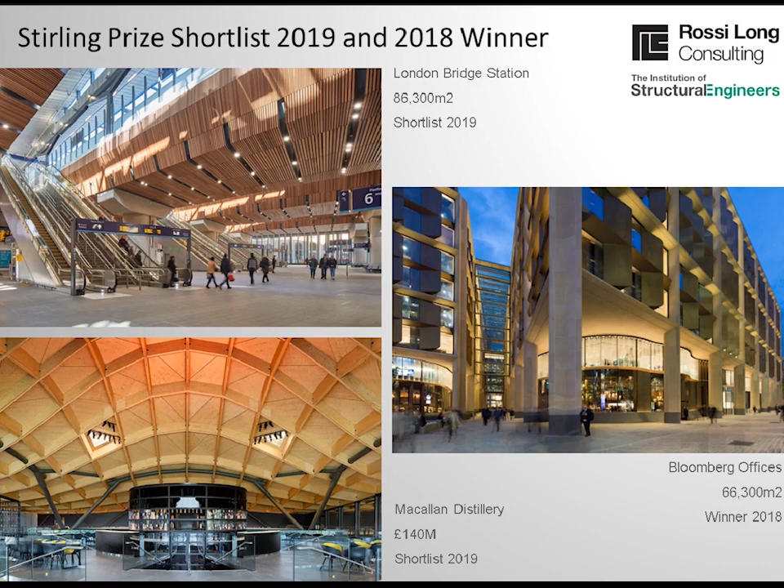Goldsmith Street, by comparison, is much more humble in scale and is recognised instead not just for its architectural merit, but also for its immediate relevance to the current issues of fuel poverty, carbon reduction and housing shortage, and it succeeds in pushing the boundaries of the visual appearance of passive house developments. I believe this development has potentially the strongest message among the finalists, and its success emphasises the significance of sustainable development, and in particular housing.

There are already signs that the profile of this project and what it set out to achieve is already changing the mindset of some of those who influence local authority housing, and this could be the far more reaching legacy of the project, thanks to the RIBA judging panel.

For those of you who relish detailed calculations and groundbreaking technical complexity, I'm afraid my presentation won't be going down this route. Goldsmith Street remains a low-rise residential development at heart, but there were a number of technical challenges which I will highlight. Instead, I thought this was an opportunity to give an overview of passive house standard construction, its relevance to our collective challenge of meeting sustainable design standards, and share my experiences of structural design on a passive house scheme. So today I'd like to talk on three areas.

I'm going to start with a review of the sustainability challenges that the institution has presented to its members online and through recent publications of The Structural Engineer. What are the objectives? What can we be doing to change and influence the designs to be more sustainable? And what are the challenges? Well, one approach is a fabric-first design to lower energy demand, and this is where the passive house standard comes in.

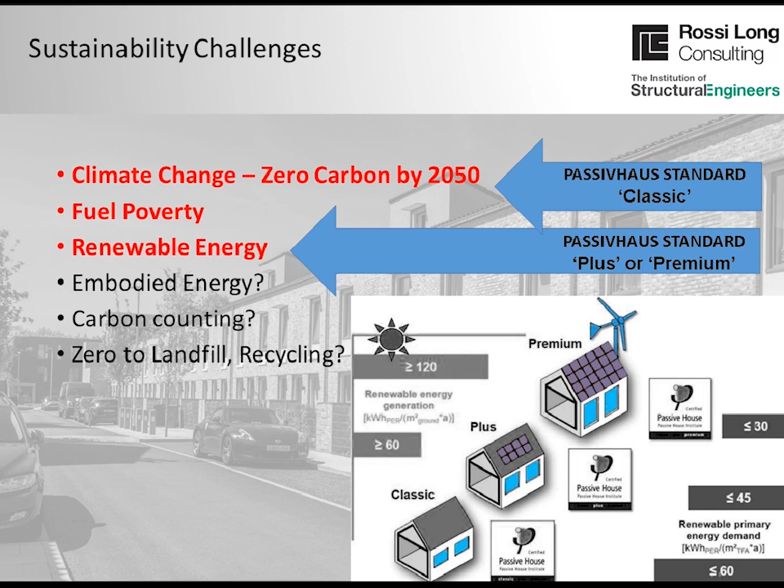So let's have a closer look at what is involved with meeting the Passivhaus standard.

The term Passivhaus is misleading, as it's not limited to just housing. It is a concept originally defined in Germany in 1996 and sets out energy performance criteria for any building type. It does not, however, define standard details or forms of construction, as we're used to seeing with robust details, and these criteria are summarised on the slide.

Passive House is growing in popularity in the education sector, where it's been demonstrated that students show greater sustained concentration levels due to the higher quality of air with lower carbon dioxide levels. There are over 20 Passive House certified schools and education buildings in the UK, with more in construction at the moment. In other sectors, we now have Passive House standard offices.

A Passive House swimming pool is being constructed in Exeter, and there's a Passive House hospital in Germany. China is currently using the standard on a vast number of residential developments. This is an approach which has great potential for our future built environment on a global scale.

So for those of you who have not encountered Passive House design, these criteria will be required to achieve the standard, and the project needs to be independently validated by a certified assessor. There's an emphasis on both design and construction in order to achieve the standard and the principal criteria.

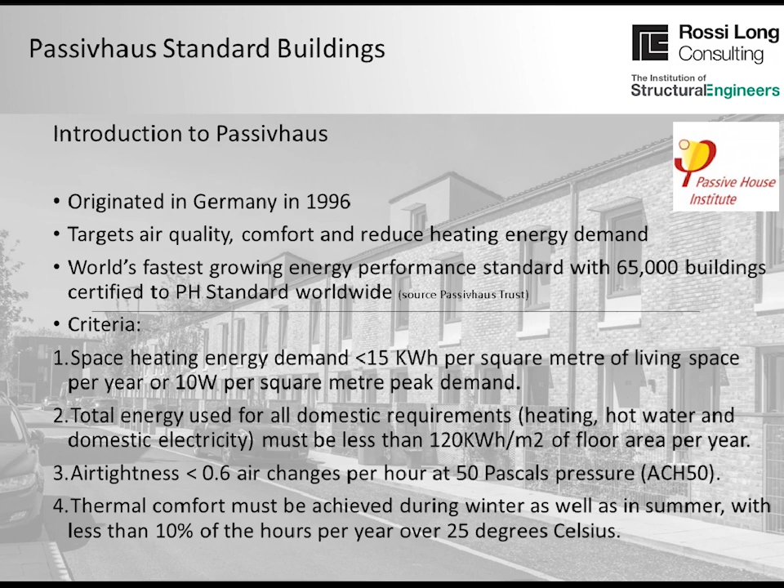And this is where structural engineers and their fellow architects and design consultants have to consider the following 5 characteristics of Passive House design. These are the design cornerstones of achieving economical Passive House accreditation.

The first is a high specification of air tightness. In the construction industry, we're accustomed to requiring a value of around 5 air changes per hour for a typical build specification. Structural engineers tend to be less involved with considering this requirement, as air tightness is typically achieved through architectural detailing and construction good practice.

Often with the contractor needing a few cans of squirty foam and tape on hand. But this approach isn't going to cut it to achieve Passive House standard, where a maximum of 0.6 air changes per hour must be achieved.

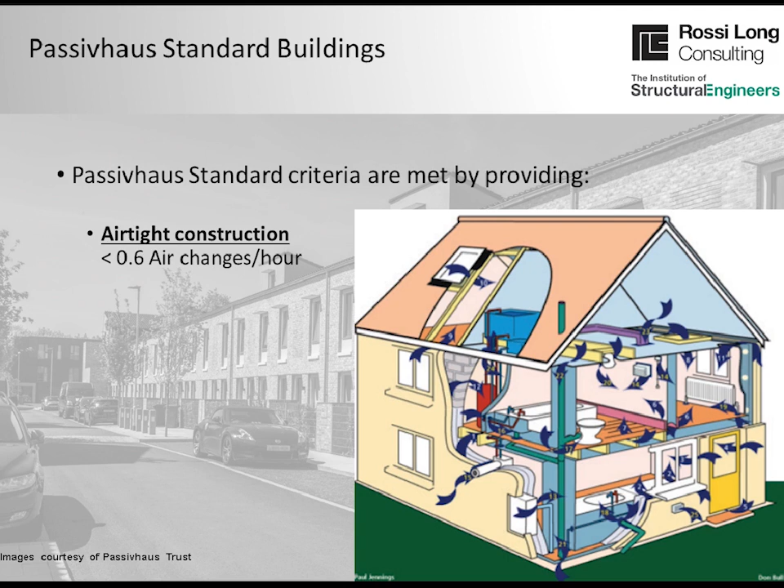It requires a great deal more coordination with the architect on how these details can be achieved, and without good detailing and a rigorous specification, it is likely that the contractor will encounter failures. The more complex and bespoke the detail, the higher the risk of problems and delays in building them. Simplicity of detail is usually the key, and without stifling the architect's creative flair can be the structural engineer's challenge.

The next is the insulation thickness. It's typical for Passive House external walls to be around 600 millimeters thick to achieve the required U values. This will have an effect on the structural components such as the foundations and outer leaf stability.

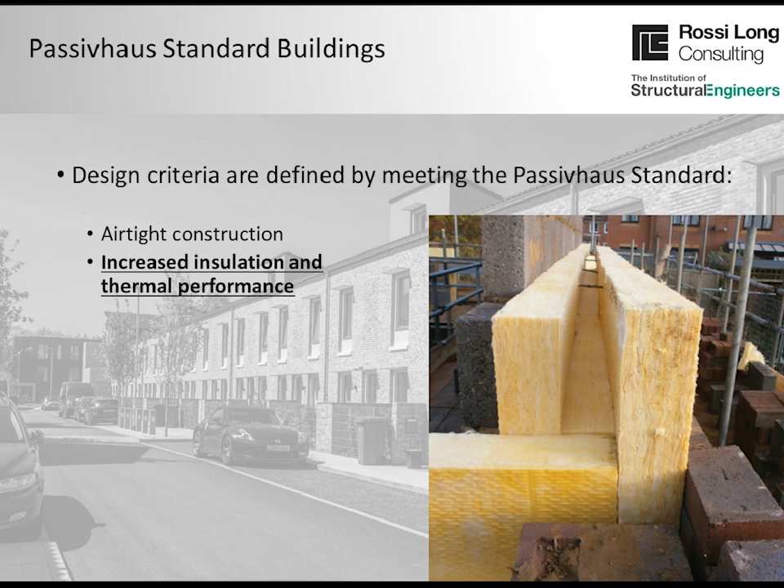And if there are high loadings through the inner leaf, the engineer has to be mindful of eccentric loading going into the foundation. The outer leaf has to be tied to the structural zone for restraint without causing thermal continuity across the cavity. And once solar shading is incorporated too, this can also present challenges.

One area which causes the most headaches for both the engineer and the assessor is the inclusion of thermal bridges. This is one of the key challenges that Passive House design presents to the structural engineer. Even with the most straightforward architectural approach with a uniform superstructure, the engineer is presented with the problem of how to provide structural continuity into the foundation without causing thermal bridging.

In most forms of construction, a structure will provide a direct connection between the superstructure and the foundation. Think of a steel column base plate onto a pile cap or pad, or a masonry wall bearing onto a strip foundation. These tend to be the points of maximum load concentration, and instinctively, structural engineers want to detail a robust and direct structural arrangement at this most critical point in the load path.

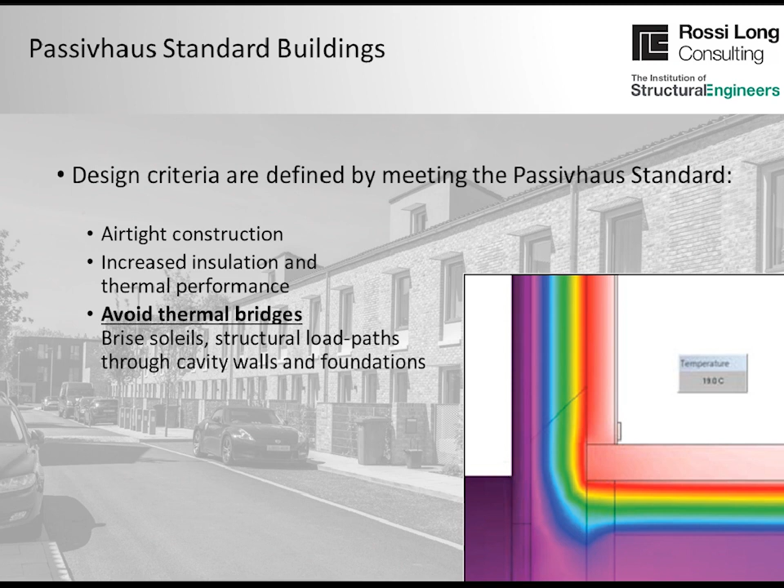But this isn't a compatible configuration with Passive House certification. Cantilevered balconies, discontinuous brickwork facades, terraces, solar shading - they also all pose similar problems, but the engineer is generally more accustomed to thermal breaks on horizontal cantilevered structural components. Generating this thermal separation is the primary consideration for the structural engineer in designing to Passive House standards.

Fundamental to the operation of any Passive House building is the use of a mechanical ventilation heat recovery, or MVHR system. This system extracts air from kitchens, toilets and bathrooms and provides fresh air to the living areas and bedrooms. The air is filtered and passes over a heat exchanger through a ducted system, the likes of which you wouldn't otherwise see in residential accommodation.

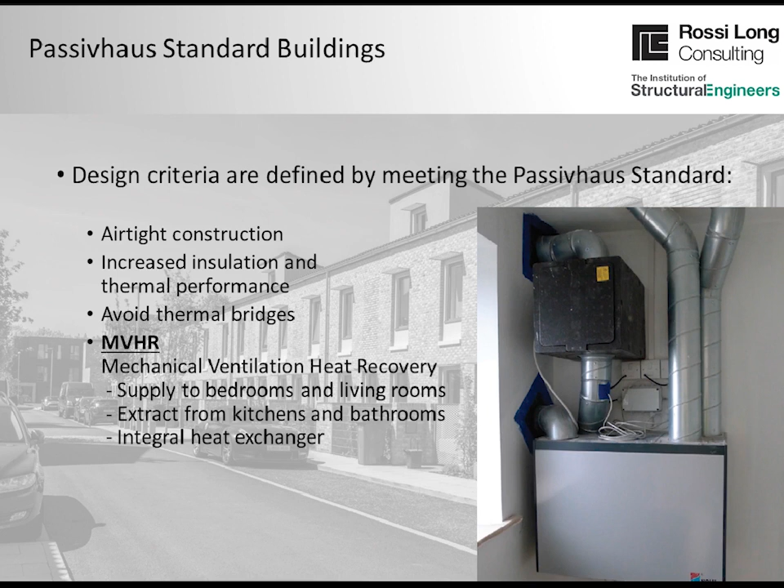As you'd expect, this requires closer coordination between the structure and the services engineer. Nobody wants to see bulkheads and boxing around ceilings in their home, so the floor and roof zones may result in a carefully designed joist and duct layout.

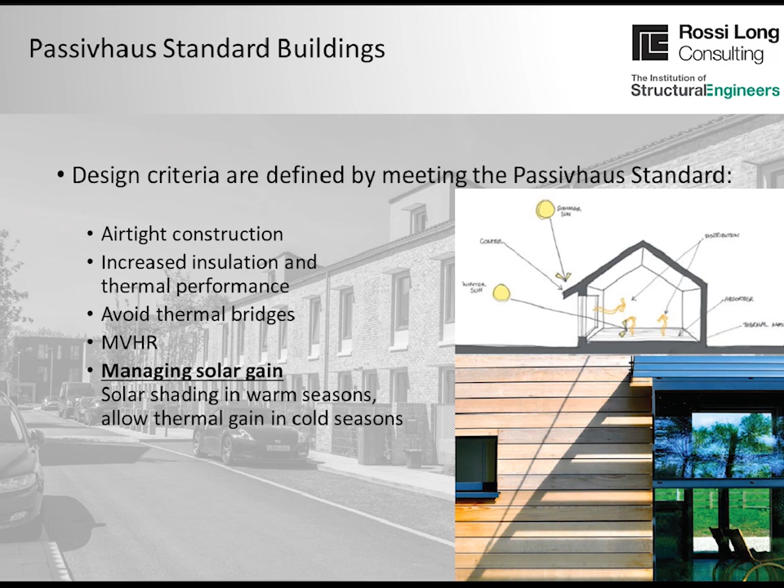The fifth and final characteristic is solar gain. This is a benefit to Passive House buildings during colder months, which provides free warming energy, but can be problematic during warmer seasons, leading to overheating unless it's managed. Building orientation and careful detailing of window sizes and solar shading is absolutely crucial to managing this, but tends to be determined by the architects and planners, though we can help inform and influence this at the outset.

For all these factors, the Passivhaus standard should be established as a requirement at the earliest stage, and the designers accommodate the specification into their design from the start. Similar to BREEAM, it's not easy to bolt on compliance with the Passivhaus standard because fundamentals such as the orientation of the buildings, external materials, building massing, and through to the building details will determine how easy this is to achieve.

One obstacle to the wider use of Passivhaus is the associated cost of construction. Costs can be expected to increase for components like windows, which tend to be triple glazed, insulation, which has so much extra thickness, and the costs associated with building to a higher specification compared to a traditional construction standard.

However, it's important to realise that these costs can offset some other components. It reduces a requirement on the thermal plant, a reduced reliance on renewable energy, and if designed well, construction detailing should be simplified by repetitious and rationalised to reduce complex details.

While preparing for today, I asked the Passivhaus consultant from Goldsmith Street what he would say to an audience of structural engineers, and his message was this: to give the contractor the best chance of achieving the airtightness and avoiding cold bridges, to reduce the risk of not meeting the criteria, to mitigate the cost uplift and to achieve the standard, the structural engineer must understand these 5 principles and influence the architect to simplify and rationalise the form and detail of the building. And this message is absolutely at the heart of good Passivhaus design.

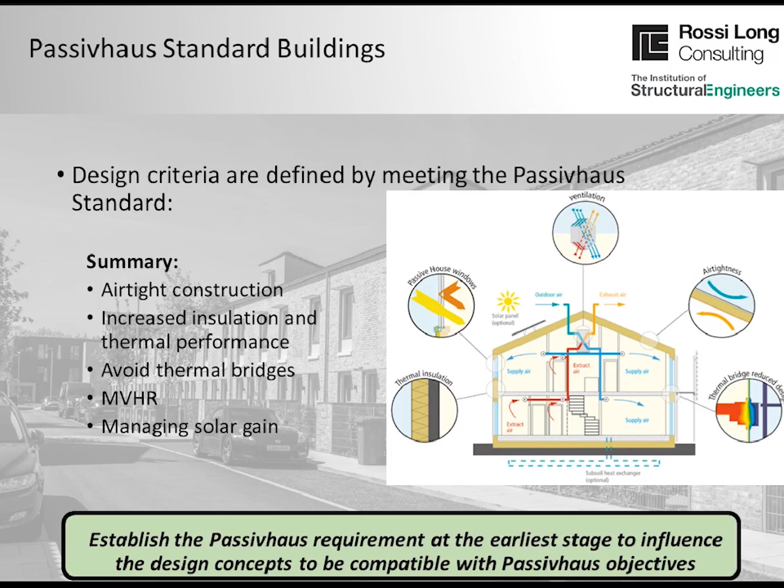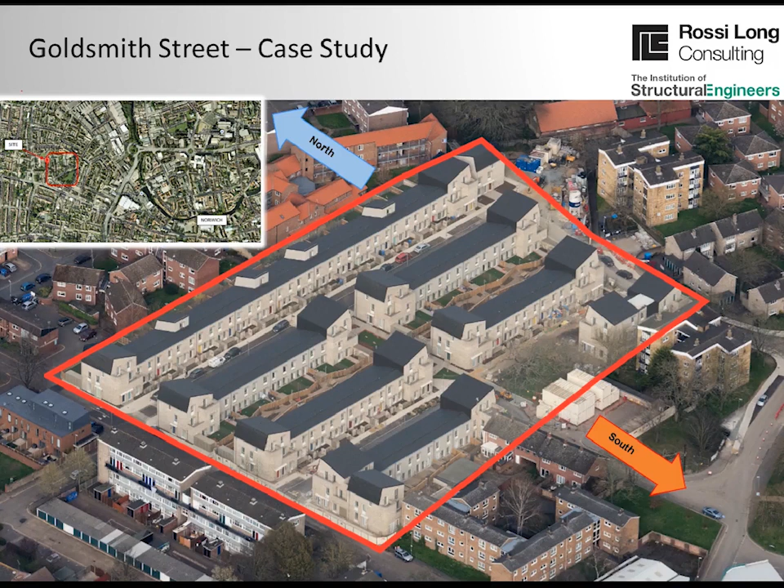So, with our 5 primary design characteristics of Passivhaus standard firmly in mind, let's look at our residential development at Goldsmith Street in Norwich. This is a brownfield development of 93 dwellings for Norwich City Council, all of which are to Passivhaus standard, and on completion was the country's largest fully Passivhaus certified residential scheme. It's located about half a mile west from Norwich City Centre within an urban residential setting.

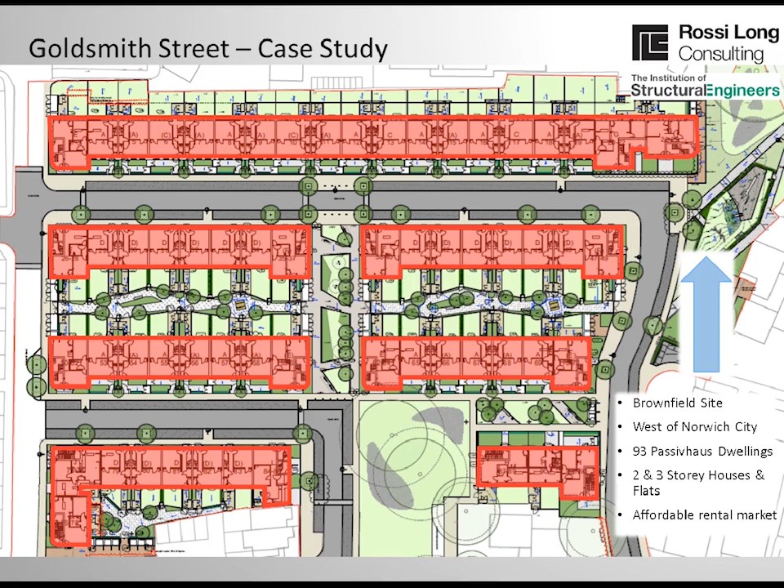The proposed development is split into 7 blocks comprising 2- and 3-storey terraced houses, with 3-storey apartments bookended to each of these blocks. The blocks are orientated such that the main elevations are south-facing. These terraces are typically around 50 metres long, and the northernmost terrace pictured here is around 130 metres long. This became a consideration in selecting the most appropriate structural concepts, in particular the foundations.

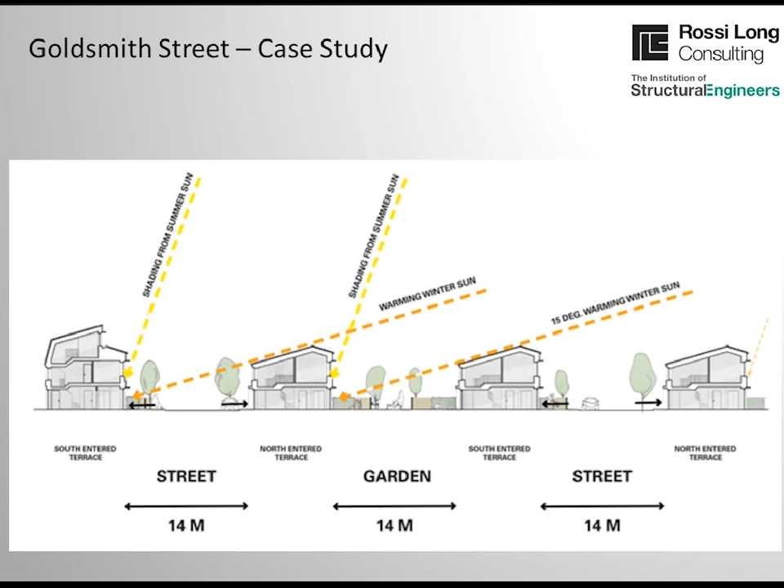This typical section through the terrace blocks gives an idea of how the blocks of housing relate to the seasonal sun positions, and also gives a sense of the scale of the development, eaves heights, and the relationship of the buildings to each other. You can also see the non-uniform configuration of the roof profiles and how the upper floor ceilings follow the roofscape. The architectural vision was a return to the Victorian model of an inclusive terraced community with inward-facing back gardens.

Mikhail Riches architects won the architect's role through a competitive basis and developed the massing and planning drawings in advance of the appointment of the rest of the team.

The requirement to meet a Passivhaus standard requires a very high level of construction control and monitoring to achieve the stringent high air tightness. During the tender interviews, the contractors were required to demonstrate how this would be achieved.

Carters were able to show that a dedicated air tightness champion was proposed as part of the team, and this was a key presence on site during construction of Passivhaus standard buildings. Their role is to understand how the architectural detailing of the vapor check membrane was proposed through regular on-site workshops with the architect, followed up by toolbox talks to present this to the operatives, who would then construct the detail, monitoring progress on site during construction. Progress was also closely monitored by the client's clerk of works, who provided weekly reports.

The development was not originally conceived as a passive house development at outset in 2008. The decision for Passive House standard was sparked by a number of factors, partly the duration of the lead-in process, during which cases of fuel poverty were an increasing factor, particularly during national recession. In response, Norwich City Council started the introduction of fabric-first energy efficient housing on other sites, leading to the requirement for Passive House standard at Goldsmith Street.

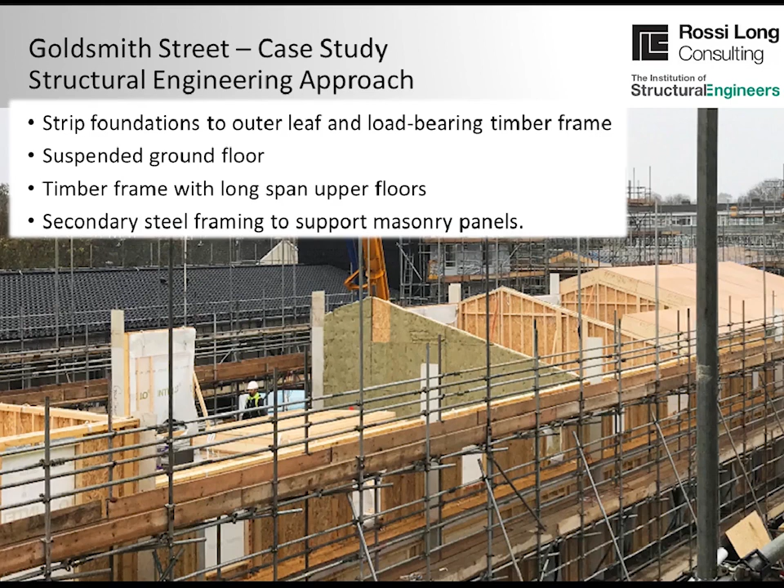Typical for Norwich, ground conditions comprised about 1 to 1.5 metres of made ground over undisturbed loose to medium dense granular soils over weak chalks at depth. Finally, due to its locality to the original old Norwich railway station, the neighbourhood had been bombed during World War II, and there was a residual moderate risk of unexploded ordnance, or UXOs.

So prior to receiving the UXO assessment, our approach was to improve the upper soils using vibro stone columns with a ground-bearing raft to support the timber frame, and an independent shallow strip footing to support the outer leaf.

The use of soil improvement is commonly used on granular brownfield sites and overcomes the variability caused by disturbed soils from previous development, and would allow for economical mesh reinforced shallow foundations to be used where deep footings would be at greater risk of collapse due to the prevailing loose granular soil.

This arrangement also provides a ready separation between the outer leaf and the internal structure by providing regular load-bearing timber frame walls supported on the raft, built off structurally rated insulation. The benefit of this approach is that there's a robust thermal break provided below the reinforced concrete raft across the entire building footprint, and internal load-bearing walls can be used frequently for an economical superstructure without compromising the thermal separation between the superstructure and the supporting soil.

It's worth noting that if you're using this method, the structural insulation layer that is typically specified as 300 mm thick, and the structural rating needs to be carefully specified with this in mind.

The structural rating for the insulation is only a strain-rated figure, and the pressure rating is usually associated with the loading at which 10% strain is achieved. On such thicknesses, a greater rating is required to limit the overall compression under loading to an acceptable figure.

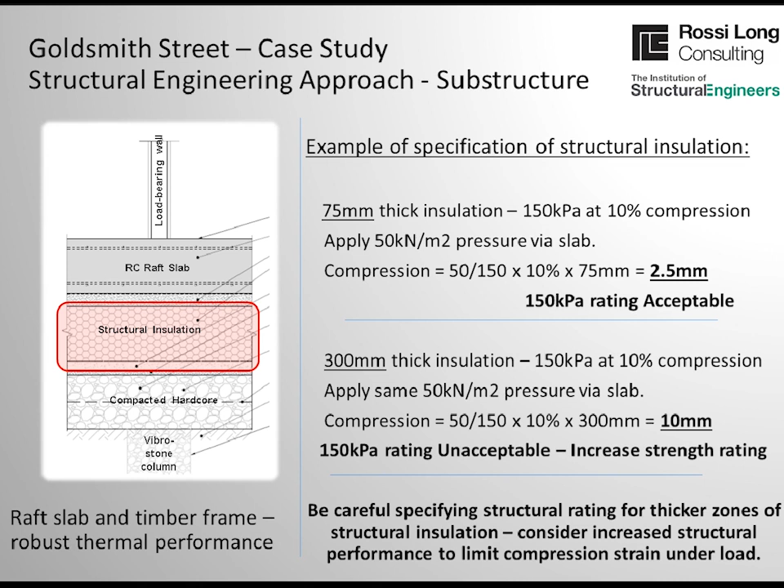A raft foundation on unimproved soils was also considered, and this can be a valid structural option for looser soils, but the loose and variable nature of the soils was simply not compatible with the proportions of the building footprint. As seen earlier, these are long and thin on plan, and with the fenestration arrangements would be particularly susceptible to cracking of the brickwork, so we worked with the contractors to develop an alternative approach.

The revised design of the foundations followed a more traditional approach, with insulated beam and block suspended ground floor and deeper strip footings. This consisted of a 150mm thick beam and block zone with insulation infill blocks and 225mm of rigid insulation above, with 75mm of fibre reinforced concrete topping, and these typically span the width of the terrace house units.

While saving on UXO testing, the effect of this revised arrangement not only increased the volume of arisings and imported concrete, but also wasn't as favourable as the Vibro Improved raft for 2 further reasons. First, the superstructure was affected as the internal load-bearing lines couldn't be supported on the structural slab. So without intermediate supporting partitions, the first floor had to be redesigned with increased capacity to span the full width of the unit.

Secondly, there is a more direct thermal route through the structure to the ground, so high thermal resistance Perinsul glass blocks were required at the bases of load-bearing walls as a thermal break.

Care is needed here, as although the Perinsul HL units have a compressive strength of 2.75 newtons per square millimetre, the units are only 65mm high, and this leads to a reduced unit strength value, which isn't suited to concentrated loads.

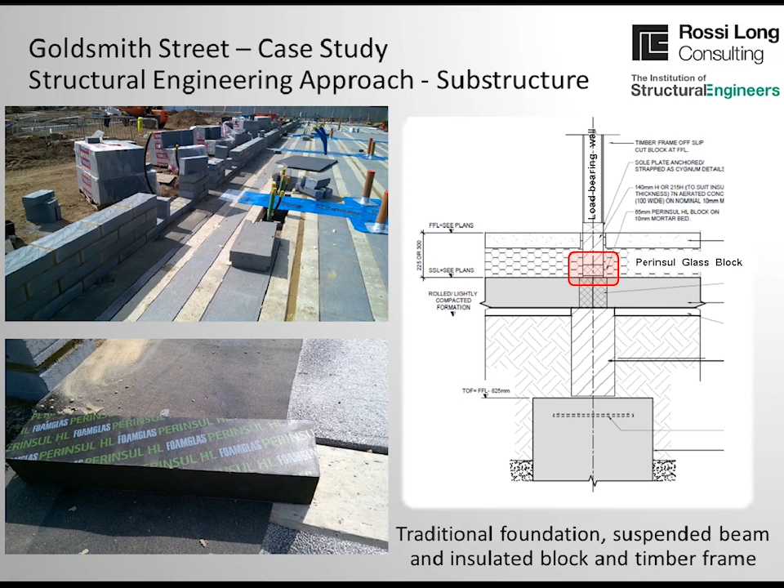You can see the foam glass block course on these drawings, and on this photo here, at the base of the party wall, and these have been set out above the finished beam and insulated block level.

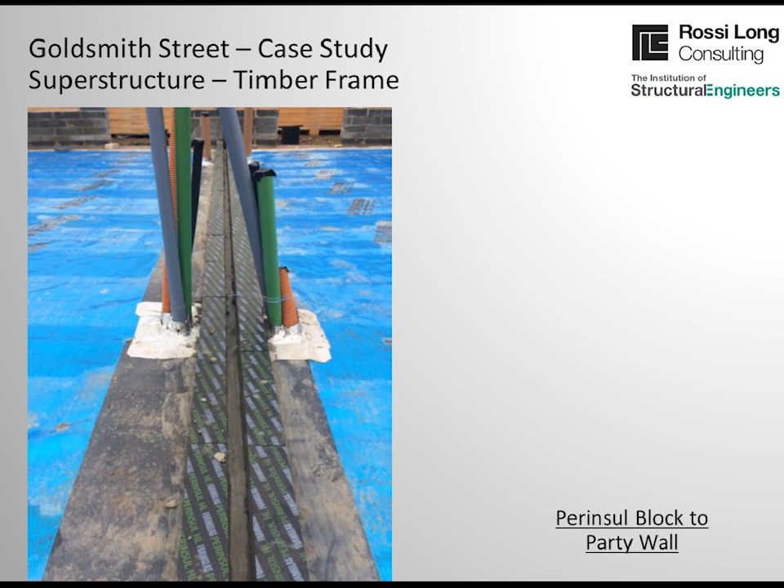Moving to the superstructure, the timber frame for the majority of the construction was relatively straightforward and was manufactured and installed by a specialist subcontractor.

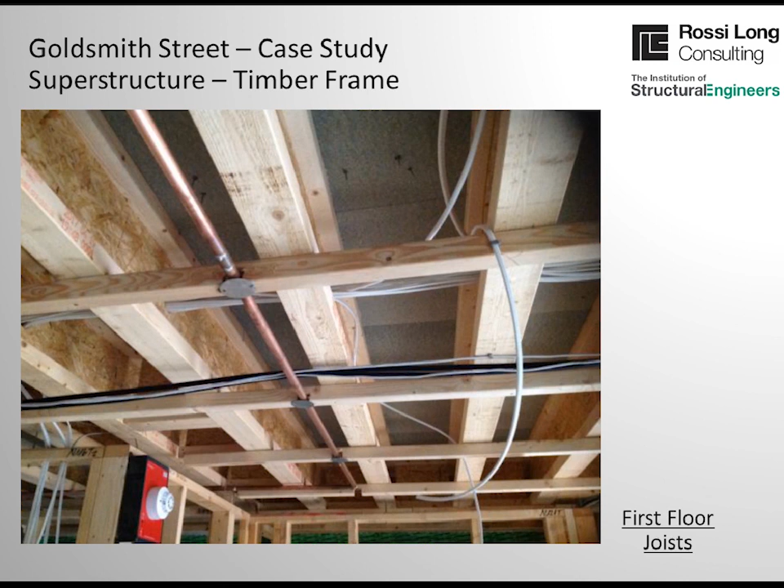The inner leaf is not so different to a traditional stick-built timber frame house, with 89 by 50mm internal load-bearing studs on the external and party wall lines, and engineered timber joists at first floor and roof level. Roof joists are typically 400mm deep, extra deep partly to provide room for the additional insulation, and the first floor joists are 240mm deep.

These joists needed to be coordinated more closely than standard housing, with the much larger MVHR ducting that you see here, especially within the floor zone.

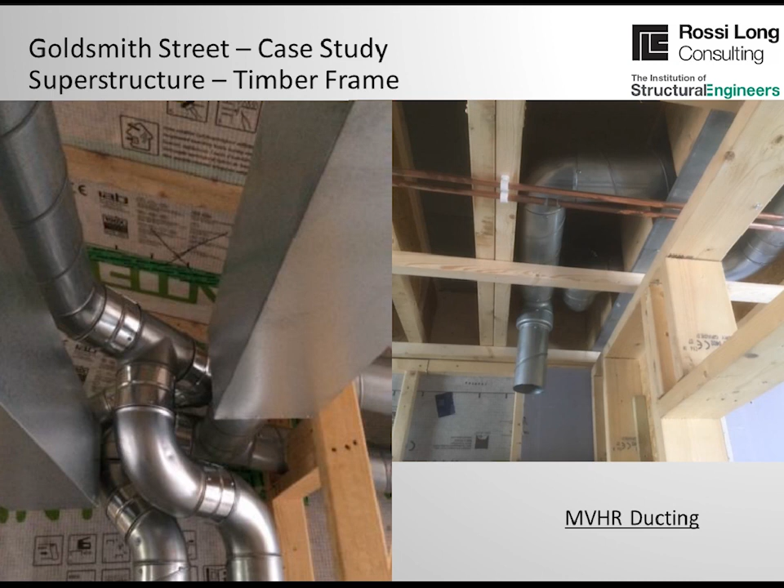The external wall construction is rather different to standard construction though, as these need to generate a cavity of some 350mm, which is filled with blown insulation and provide restraint to the outer leaf. This is achieved by providing OSB fins fixed to the sides of the load-bearing studs, and then a smaller outer stud provided to these, which provides for another OSB lining on to the outer leaf. This is used for fixing standard timber frame masonry ties to provide restraint to the brick outer leaf.

The photo shows the external wall construction prior to the fixing of the outer OSB sheathing and membrane. While the majority of the terraced housing was readily adaptable to Passivhaus, the three-storey apartments to the block ends were less straightforward, and these needed more detailed structural coordination to meet Passivhaus requirements for thermal separation.

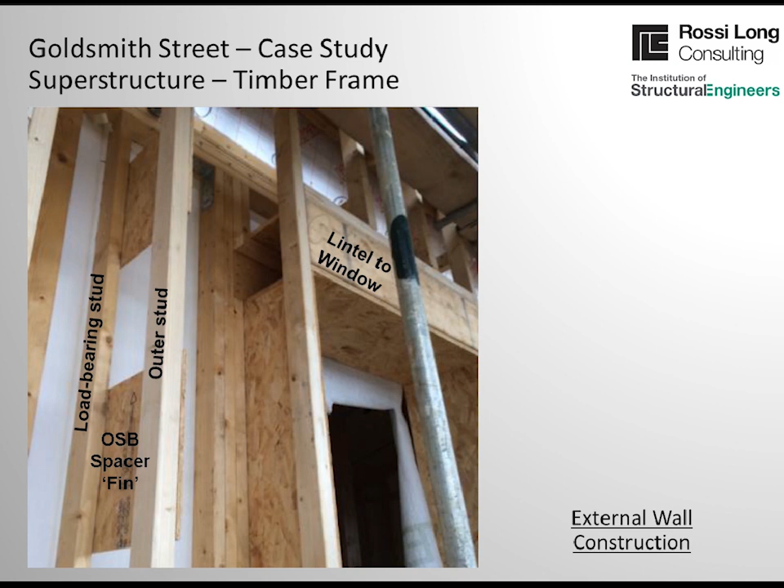To minimise costs, conceiving a Passivhaus economically typically imposes limitations on the architectural form. I'm going to touch on three areas which caused some design and buildability challenges, and how these were addressed on this project.

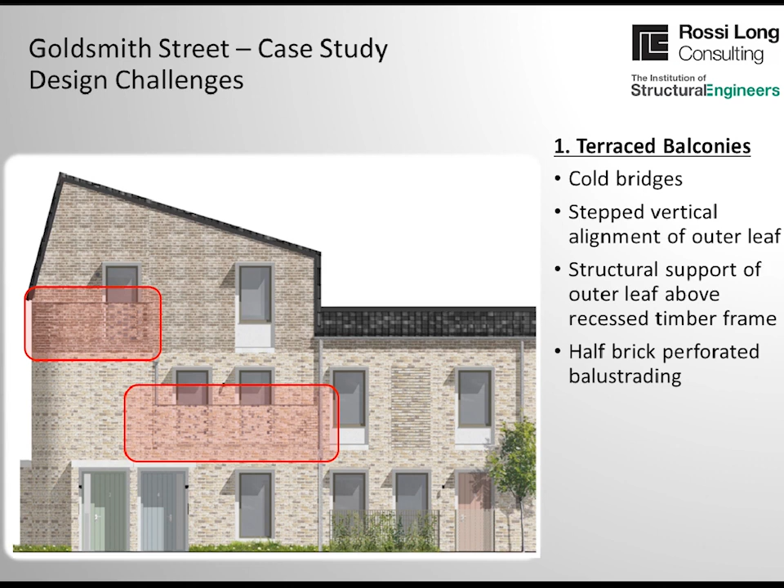First, the outer brickwork envelope doesn't align vertically down to the foundation and is set back over the internal structure. This may not have been such an issue if the facades had been rendered or clad with material fixed directly to the inner leaf structure, but a masonry brick skin was required and needed its own independent support. Careful consideration was needed to prevent cold bridges between the brickwork, the steel supports and the internal spaces. As brick slips weren't an option, the configuration needed a combination of secondary steel goalposts to support the main panels and hot-rolled steel box section lintels to support the upper panels of masonry.

The goalposts were located fully within the thermal envelope, so these were effectively warm structures, and the posts bear onto low thermal conductive structural blocks. The brick panel is separated thermally from the steel goalposts to prevent cold bridging between the brickwork and the steel posts. The lintels, on the other hand, are located within the cold zone and didn't require this approach. In the photograph here, the panel to the left is supported on a warm goalpost, and the narrow panel facing you is on a cold lintel.

This arrangement also needed very careful coordination in order to function as a structural balustrade, made more difficult by the large cavity to the external wall, effectively removing the internal structure as an option for restraint. The perforated brick balustrade was ultimately achieved using resin-anchored stainless steel threaded bars within the brick balustrade, post-tensioned through pre-drilled brick units, with a structural cap plate to the head of the balustrade wall. This cap plate acted as a horizontal beam with restraint at each end from the abutting panels of masonry. This was particularly challenging in construction due to the necessary coordination needed.

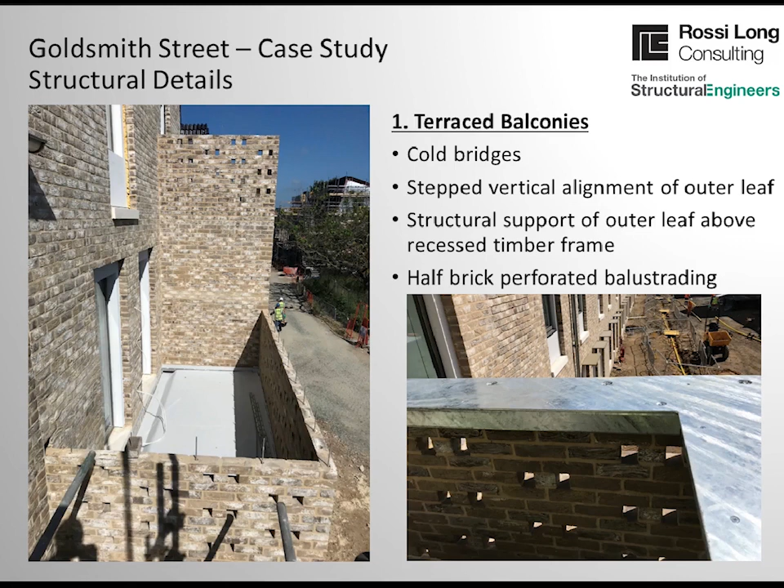Another challenge, by no means unique to this project, is the fixings for the brise-soleil solar shading. Solar shading is a common feature of Passivhaus buildings, but again presents a structural engineer with a problem of how to prevent a cold bridge. Typically a thermal pack will be sufficient with a rigid connection through the external envelope of the building. However, the large insulated cavity is too remote to the external leaf, and the fixing is based on the outer stud line within the cold zone.

This outer OSB lining was reinforced by the timber frame manufacturer above the south-facing windows, and rigid steel cleats were bolted to allow connection for the solar shade.

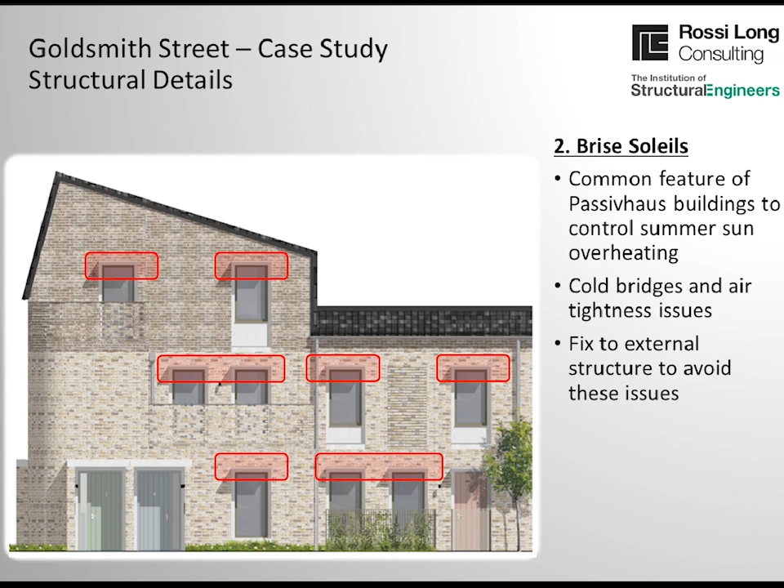However, due to the relatively accessible positions of the ground floor brise-soleil, there was a concern these could be vandalised or susceptible to overloading. The brise-soleils were architect specified, of aluminium construction and deliberately lightweight in nature. While able to withstand naturally arising events such as wind and snow, these would not be up to malicious damage or excessive loading through misuse.

In the event of a bracket failure, the primary bracket fixings would not be accessible, so a hierarchy of structural resilience was established, increasing in strength from the outside moving inwards, such that in the event of solar shading being overloaded, the first point of failure would be a connection that is accessible and maintainable. The client wanted this confirmed by demonstration, and a test rig was trialled on site and loaded to failure, which as designed was of the external bracket framing. The unit was then unscrewed from the outside and a replacement unit reinstalled.

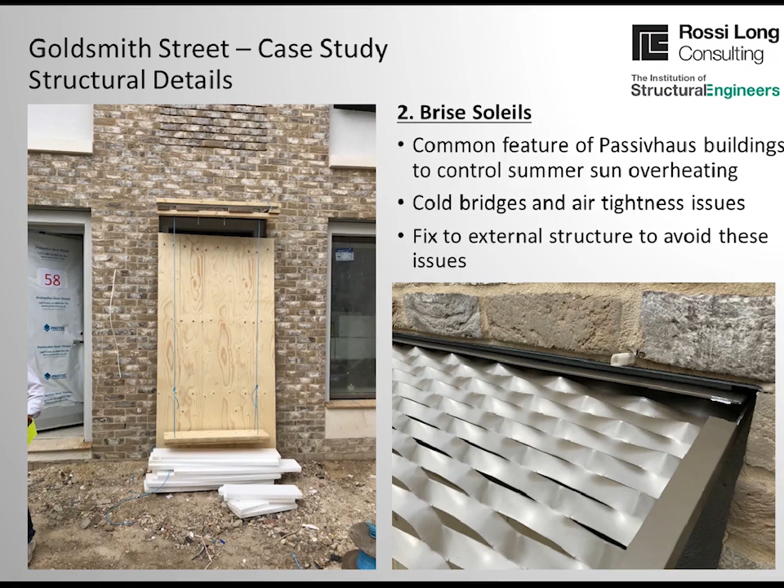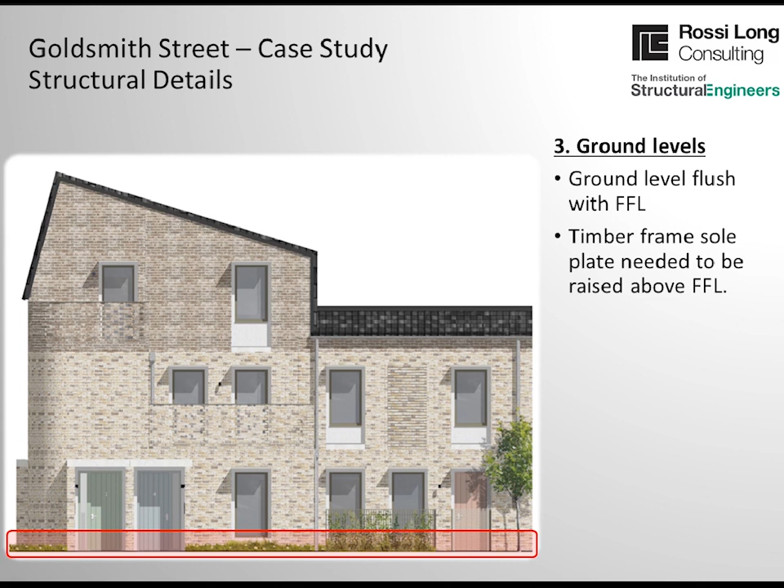One final area that led to some awkward detailing was the relationship between the floor levels and ground levels. The architect wanted to avoid ground levels stepping up and down on the long elevations relative to the front doors, which needed to be flush and level. This was difficult to avoid, particularly where the front doors were directly accessed off the pavement. With a timber frame superstructure, there needs to be vertical separation between ground level and the sole plate, and this led to the introduction of a 225mm high blockwork step under the sole plate, and a complication in the thermal connection and vapor control layer at this point.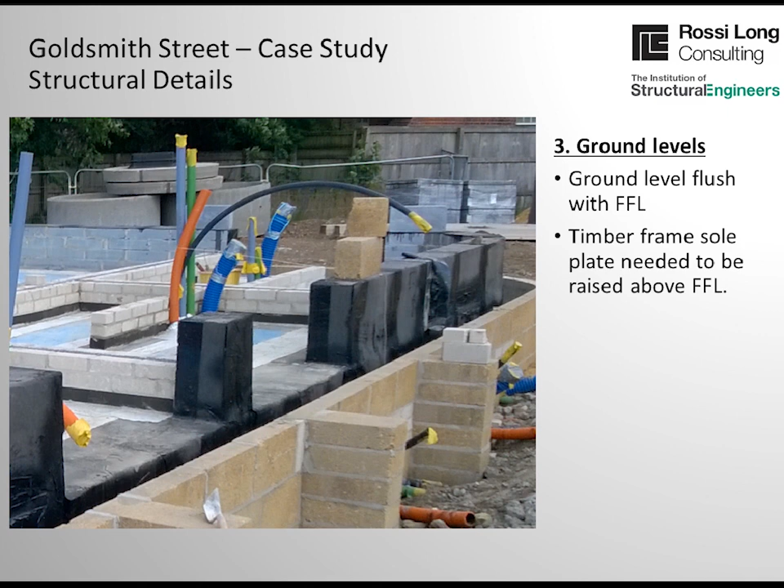So from the development, I think these three items - the floor levels, solar shading and the step masonry panels - are the main areas I would flag as items to concern early in any passive house development, and I'd urge you to review these sorts of items with the architect at the earliest stages.

So moving to our closing thoughts for today, for Goldsmith Street - could more have been achieved, and what lessons were learned? Well, the scheme has been received as a success by the construction industry and recognised in the highest possible way by the RIBA last year. It has clearly inspired other local authorities to look at how future housing stock, social housing stock, is delivered, and this, in my opinion, is the project's greatest success.

The brief has to drive the decision to build Passive House, and in the broader picture, this is a clear way to delivering net zero carbon buildings by 2050. Without Norwich City Council's decision to demand Passive House, we probably wouldn't be discussing it here and now.

Following this being defined in the brief, we need to bridge the knowledge gap in consultants and be designing Passive House projects that have synergy with the 5 characteristics of Passive House design, namely no thermal bridges, increased insulation, achievable air tightness, allowing managed solar gain, and a coordinated air supply and extract system.

Some details on this project certainly presented some challenges, and I hope that in sharing these today, these experiences will benefit the wider promotion of Passive House standard design and development. My advice, and that of the Passive House consultant from Goldsmith Street, to anyone about to embark on a Passive House project, is to work with the design team to keep the details simple.

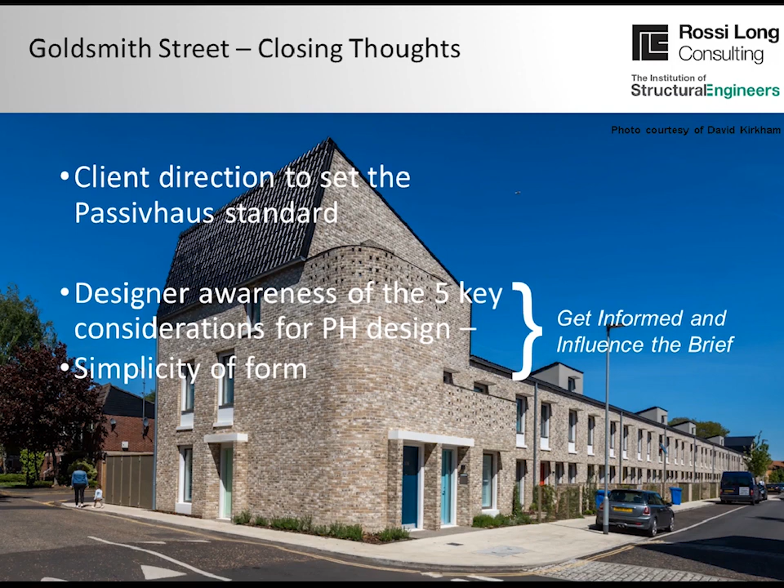More can be done in our pursuit to improve the sustainability of our built environment. For example, Goldsmith does not have PV panels or other renewable energy options to further improve its performance. And although there were measures taken to improve carbon content by using cement replacement, and we undertook a lot of recycling of demolition arisings on the project, the materials it's made of were driven more by efficiencies than environmental impact of the construction material.

But everyone involved with the project will not be surprised to see future Passive House projects rolled out in other local authorities who build on the success of Goldsmith Street and incorporate these wider sustainability factors in too. The institution is currently doing a great deal to improve sustainability knowledge through a number of committees promoting Declare, which is seeking support from industry and individuals, and I would encourage you to join them.

The challenge will remain that the client needs to lead the way, as has been demonstrated by Norwich City Council at Goldsmith Street. Thank you. I hope you found today's presentation of interest, and many thanks for your attention.